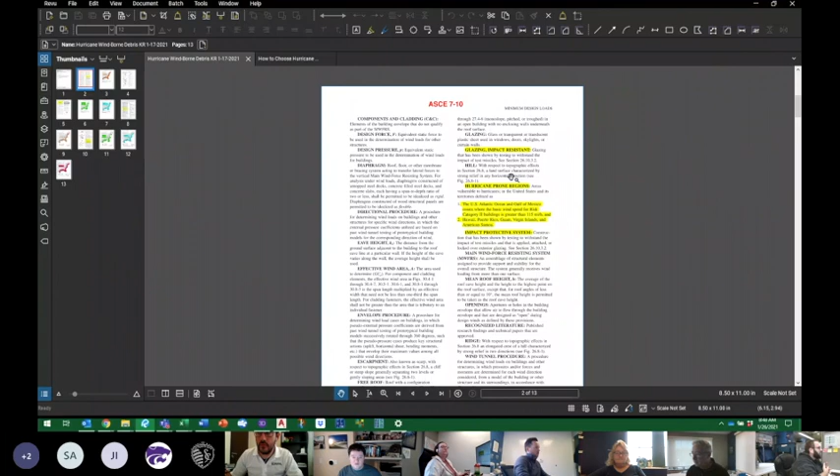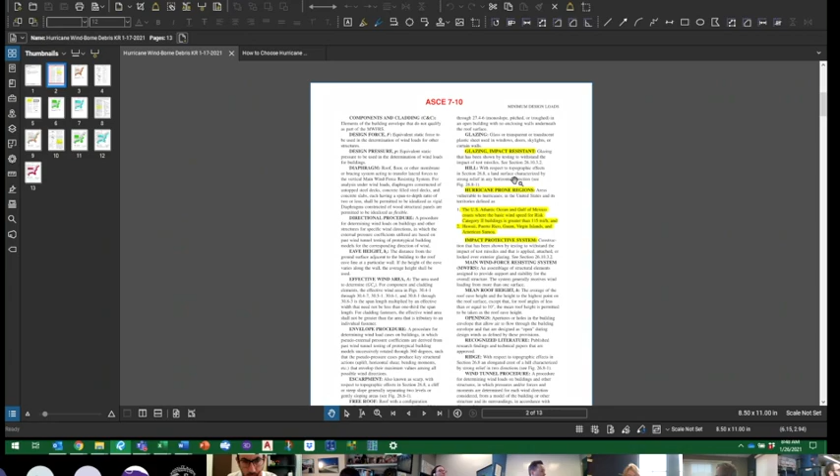Today I just wanted to discuss briefly hurricane and windborne debris regions and how they're affected by the code. So basically, for glazing impact, it just says it has to be tested with missiles. Well, those missiles are 2x4s that are typically launched in a testing apparatus at the structure to make sure everything works and doesn't blow out of the opening, and doesn't allow anything from the exterior to get in.

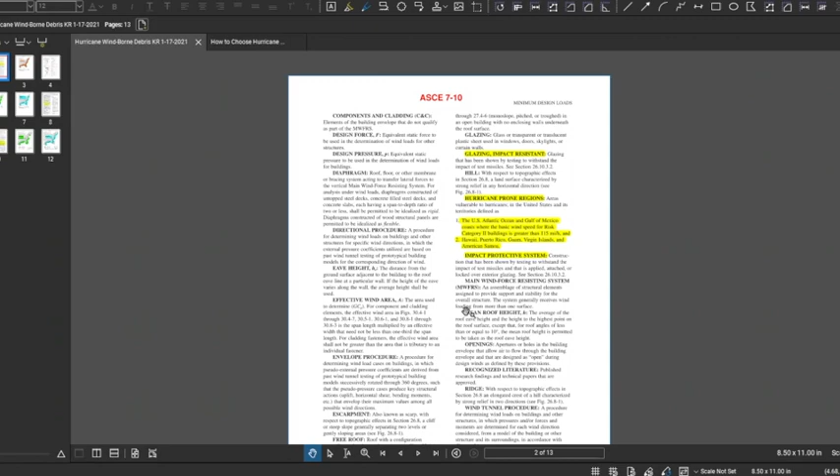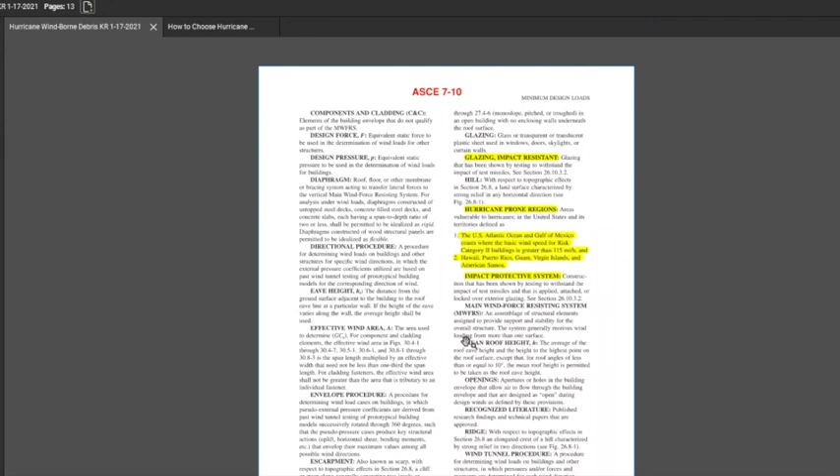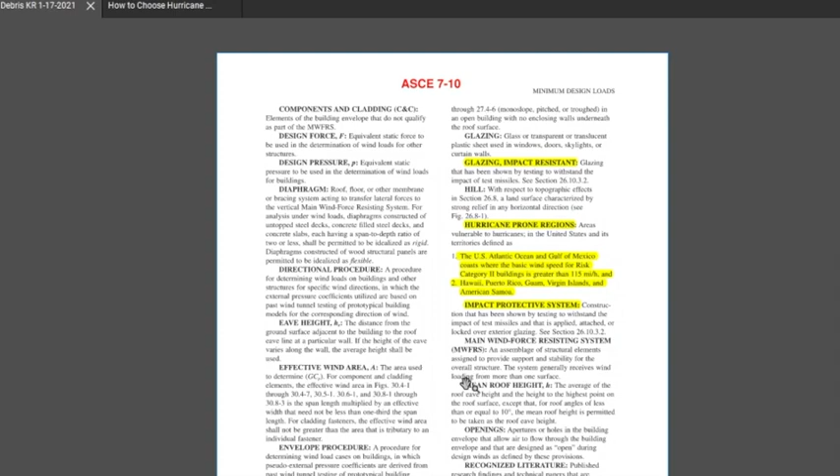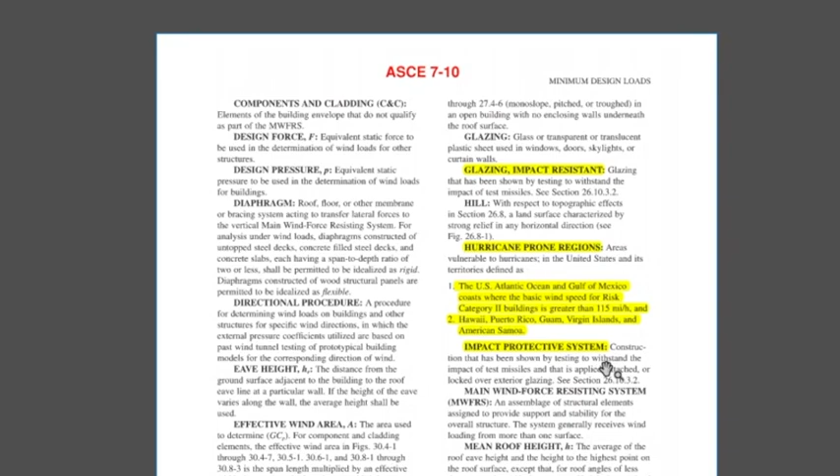Hurricane-prone regions are just going to be the regions that are prone to seeing the wind speeds associated with hurricanes. It doesn't mean that they have to have an impact-rated system within that zone. There is, as you'll see coming up, a limit to the speed where you have to have impact-rated systems. So for a Category 2 building, anything that's greater than 115 miles an hour is going to be considered your hurricane-prone region for 7-10.

Just to give you an idea on a map, anywhere that you see this orange color, that is the 115 mile per hour line. So from that to the Gulf, to the Atlantic, that's going to be your hurricane-prone regions, according to ASCE 7-10.

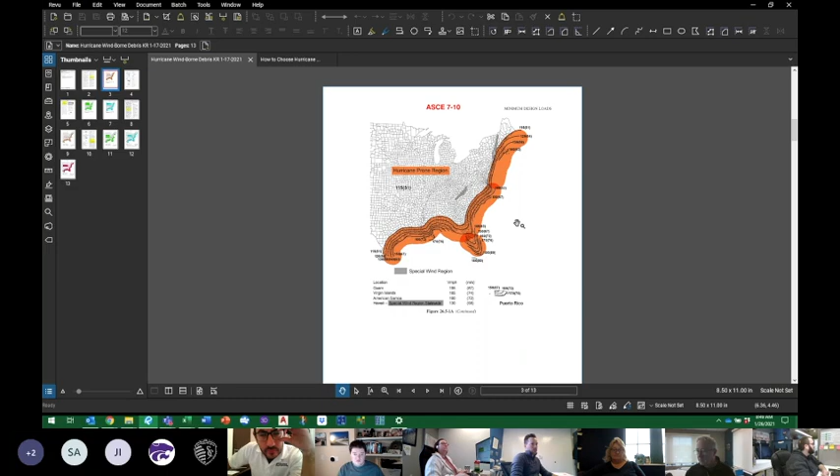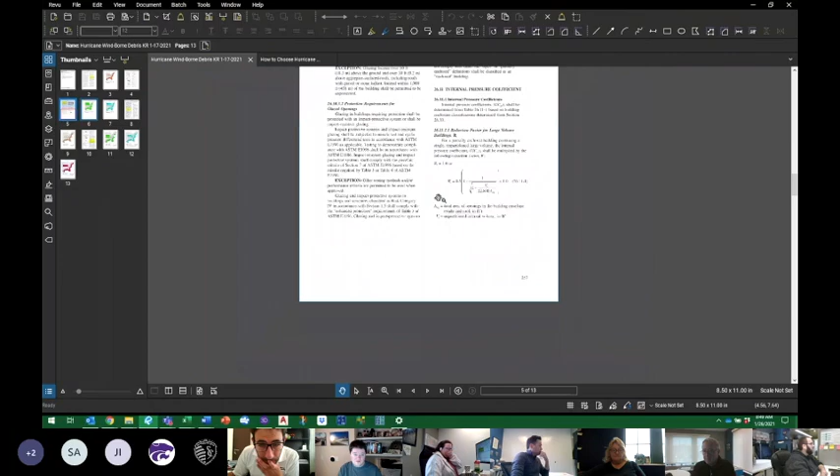So diving a little bit deeper, there's a section in Chapter 26 that deals with windborne debris regions, and they talk more in depth about what that is. Well, if you're within 1 mile of the coastal mean high water line for the ocean or the Gulf, or it's greater than 130 miles per hour, it has to be an impact-rated system. This also includes areas where the wind speed is greater than 140 miles an hour.

Now, there is a little note underneath it that is highly important for us to understand. For risk category 2 buildings and structures and risk category 3 buildings and structures, except those that are healthcare facilities, we're supposed to use the category 2 maps to determine the wind speed to get your requirements for an impact-rated system being needed or not.

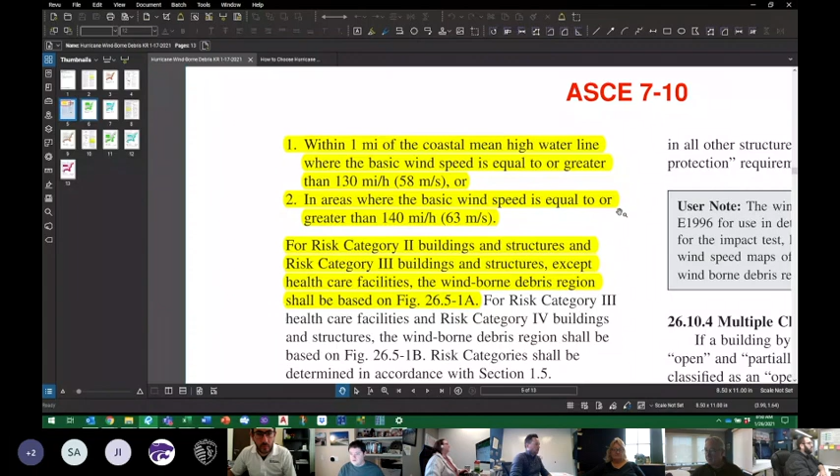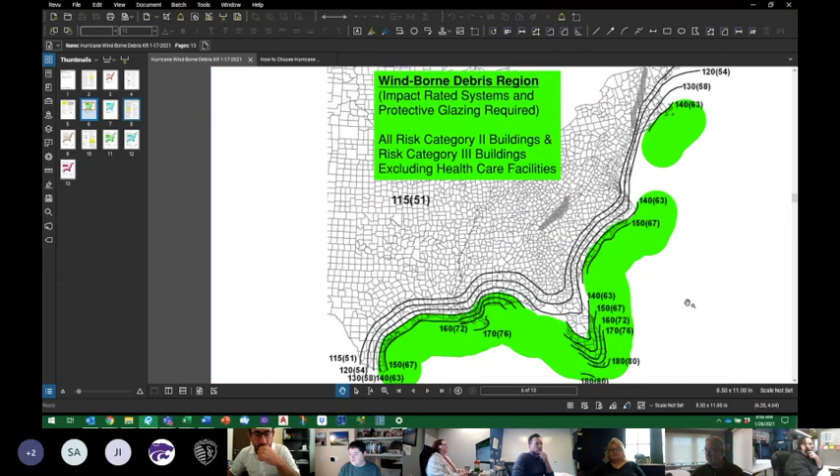So once again, we'll look at that map. 140 miles an hour is the limit where you do need to have an impact-rated system or protective glazing, for any risk category 2 building and any risk category 3 buildings excluding healthcare facilities. So that's what that map looks like. And this is all on the server and in the lessons learned if you need to pop it up just to look at it.

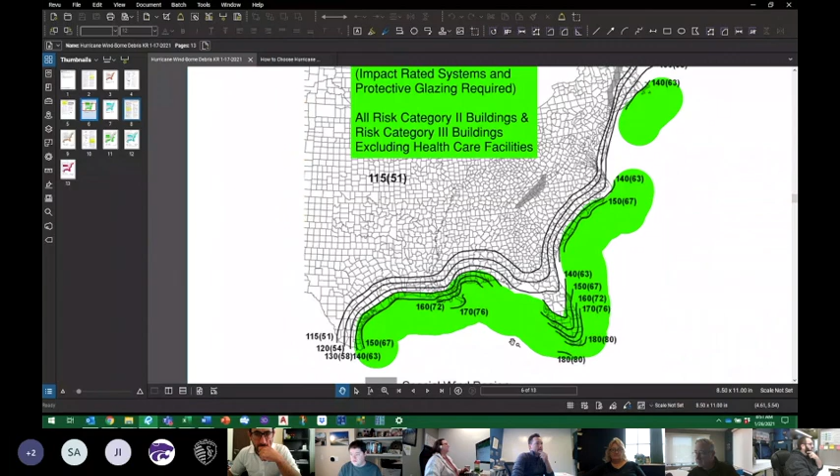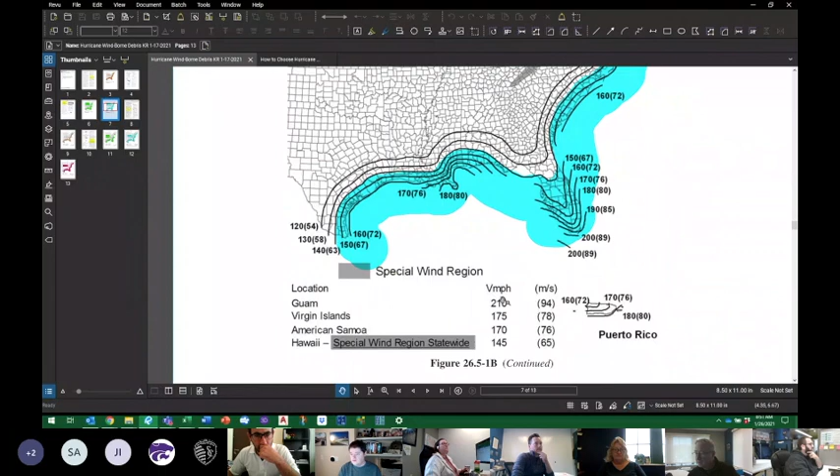And then for a risk category 3 healthcare facility and all risk category 4, we're using the risk category 3 wind maps to get that 140 mile per hour line. And you see that more of the inland coast is affected and requires impact-rated systems and glazing.

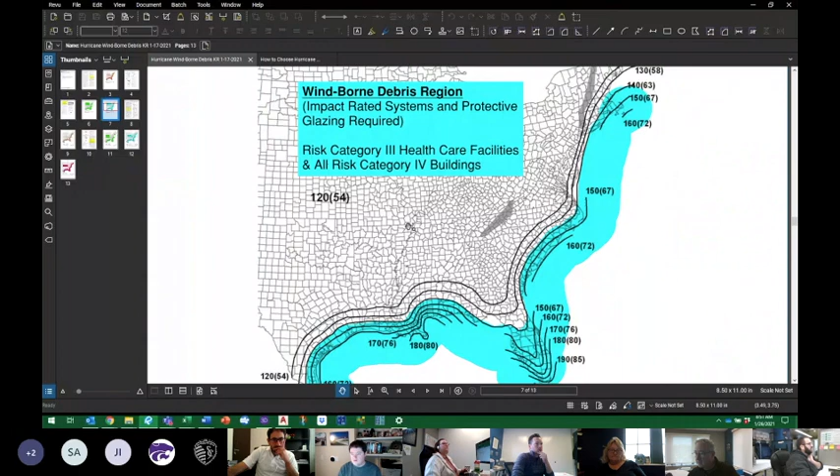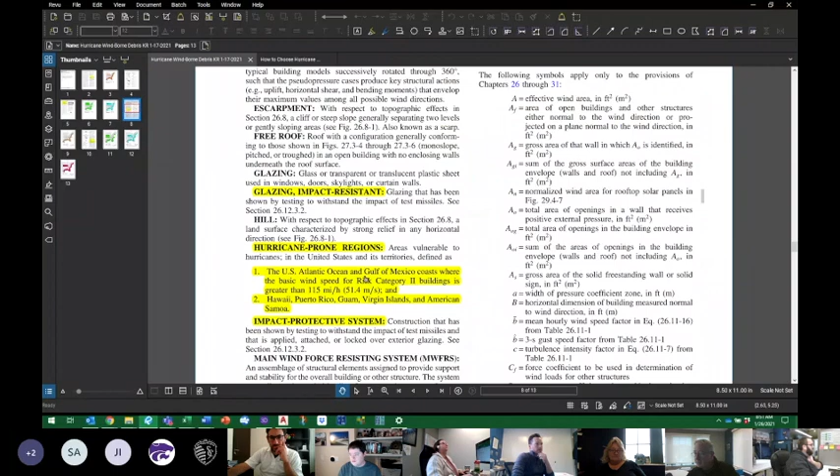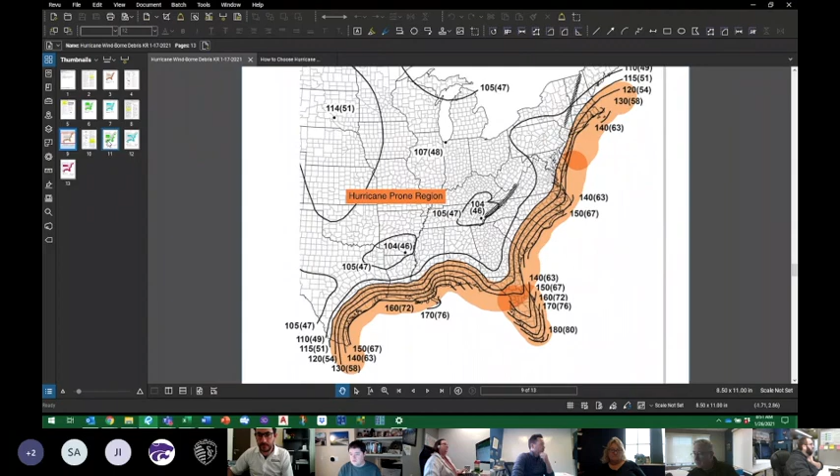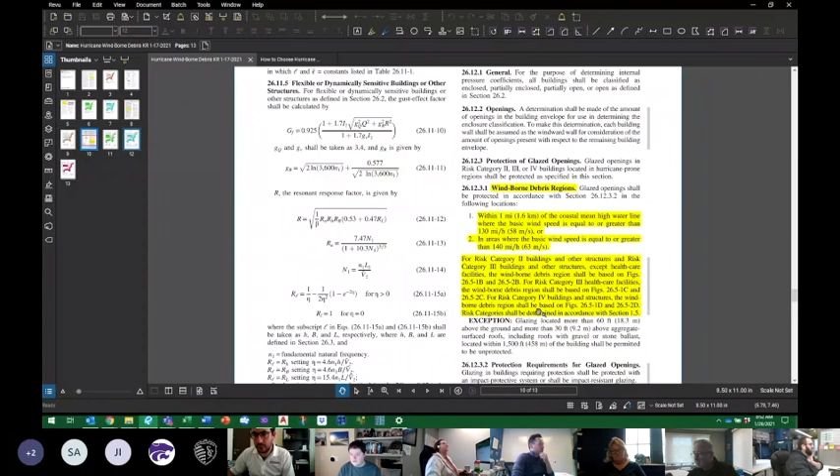7-16 basically has the exact same wording for glazing impact for the hurricane-prone regions. Very similar maps, slightly different just due to the new updated wind speed contours of the map. So you get a little bit more inland in 7-16. The same wording is in Chapter 26, the windborne debris regions, as it is in 7-10. It reads the exact same. It's just the maps that are changing.

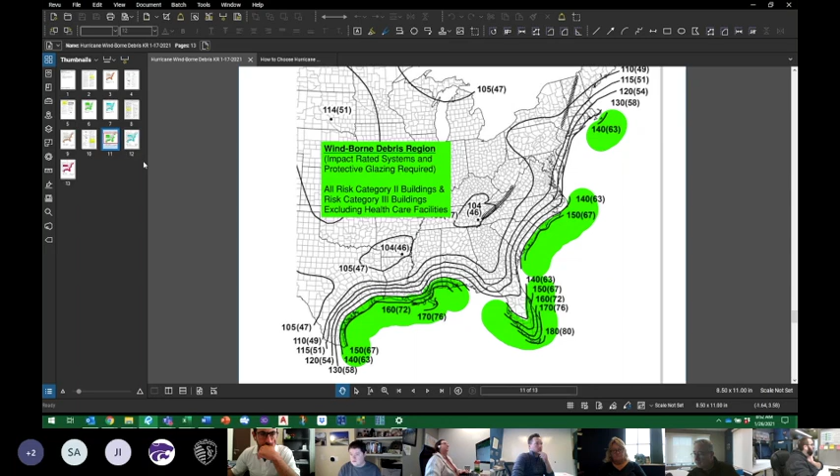So I just wanted to make everybody aware of the requirements for what we need, and what the maps actually look like for the regions that are considered hurricane-prone versus those that require impact systems. And if you've never seen the impact testing, I found a good little video, because I think it was 2 weeks ago, some of us sat in on a Texas Department of Insurance presentation, and they indicated in that presentation that you don't necessarily have to have a laminated IGU.

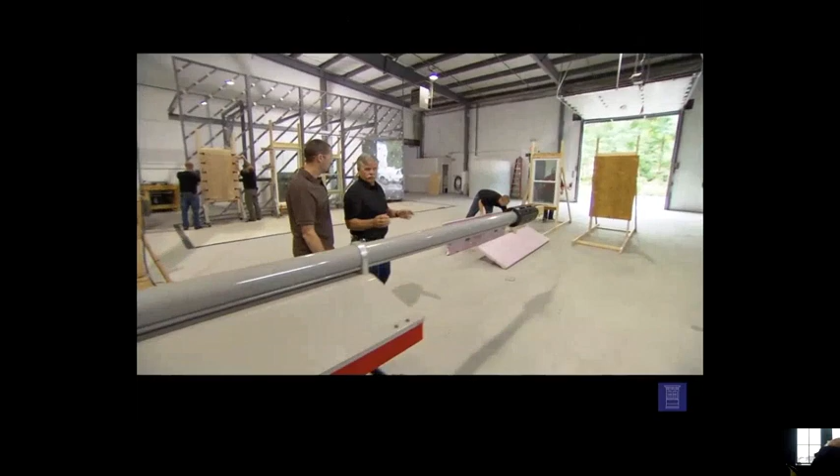There are other means to protecting the glazing, and this kind of goes into some of them, and you can kind of see the pros and cons of them. Now, this is a testing facility, and it's not really open to the public, but I thought it would be a great place to show you all of the options that there are when covering your windows and doors during a hurricane. And to do that, we're actually going to use this right here. This is actually a cannon that will fire a 2x4 at all of those options and show you how they hold up. It will fire a 2x4 at 34 miles an hour at a window or door.

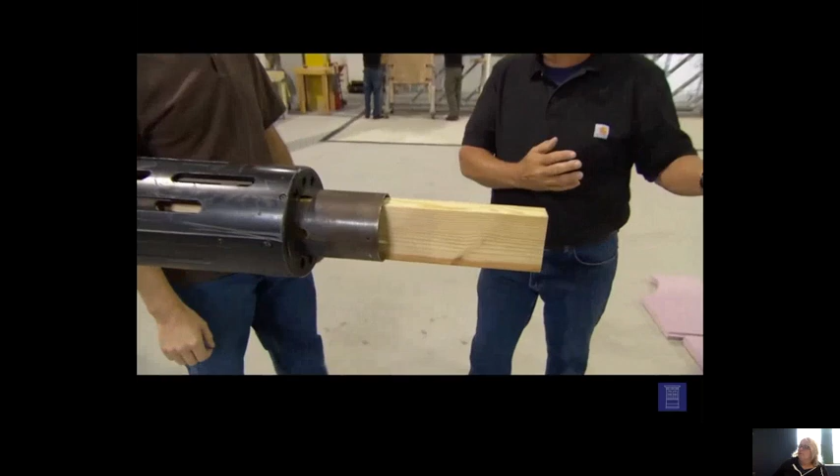Wow, a cannon, Tommy? Why 34 miles an hour? Well, 34 miles an hour, even though the winds of a hurricane may exceed 100 miles an hour, that's the speed that an object is picked up and thrown through the air, like a trash barrel or a tree limb, or in this case, a 2x4, pick it up and throw it through the air at those doors and windows at 34 miles an hour.

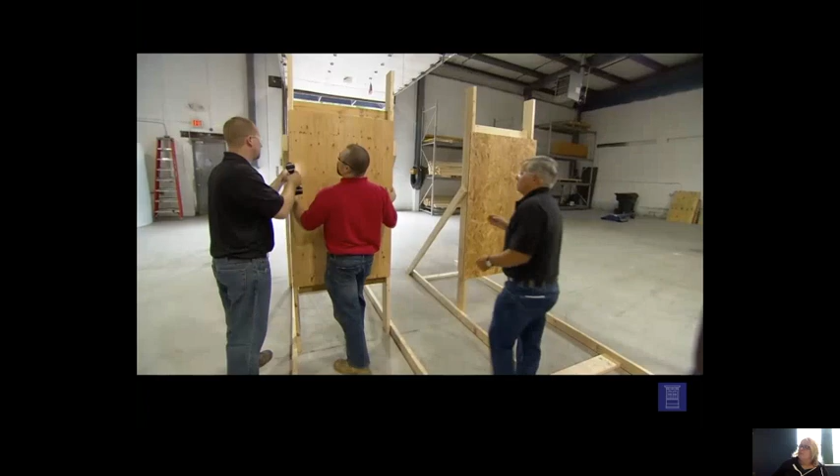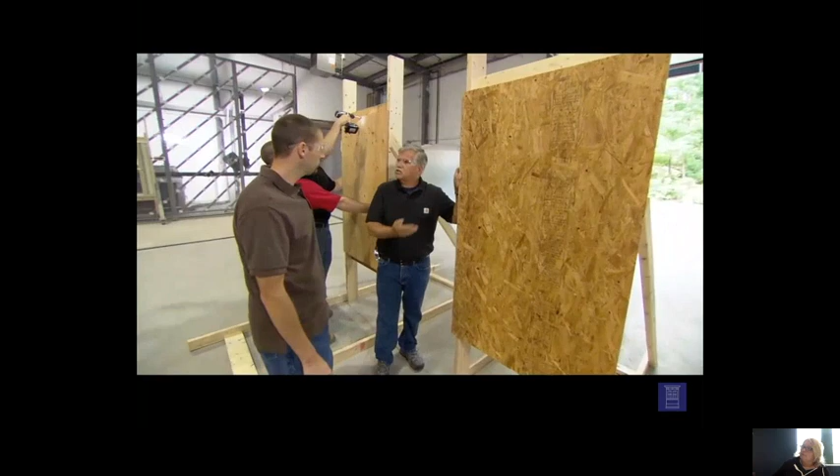Now, in most cases, you see people boarding up their windows and doors using plywood. Now, it's important that the plywood is cut to fit the opening, and the building code says that that plywood has to be a minimum of 5/8 of an inch thick. Now, that 5/8 of an inch thick plywood is $30 a sheet. Now, as a homeowner, you may go to the lumberyard or home center and say, well, gee, I can get a sheet of 1/2-inch OSB. It's $10 a sheet and save some money. Well, that's what I want to do. I want to save a few bucks. Well, okay, cheapskate, let's see what happens.

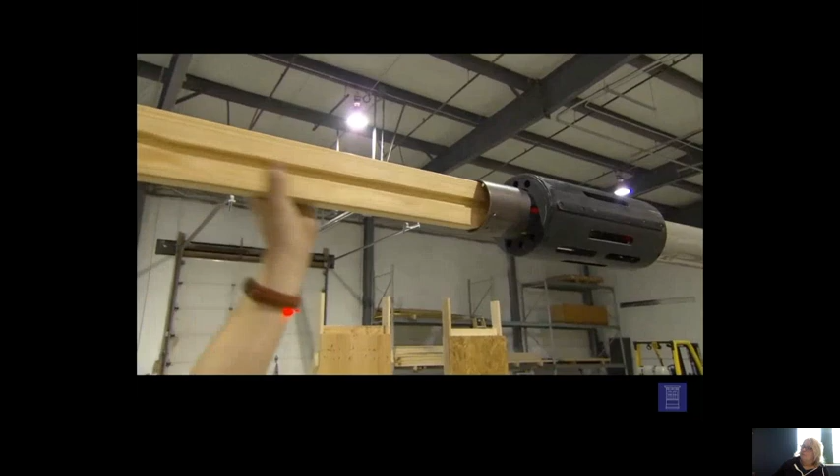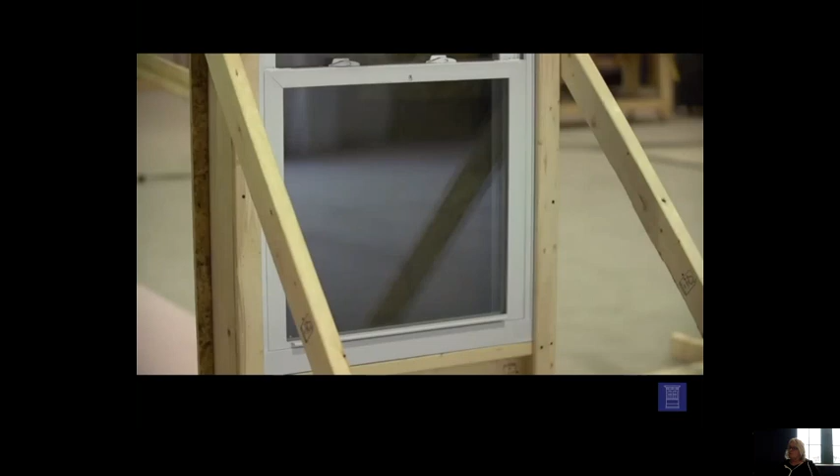Okay, here we go. You can see the cannon is aimed at the OSB. You can see the red laser. That's where it's going to hit it. Wow! That 2x4 went right through the OSB and through the window. Looks like you're going to have to get a new window. Wow, I didn't save any money there. You sure didn't. Let's see what happens with the 5/8 plywood now.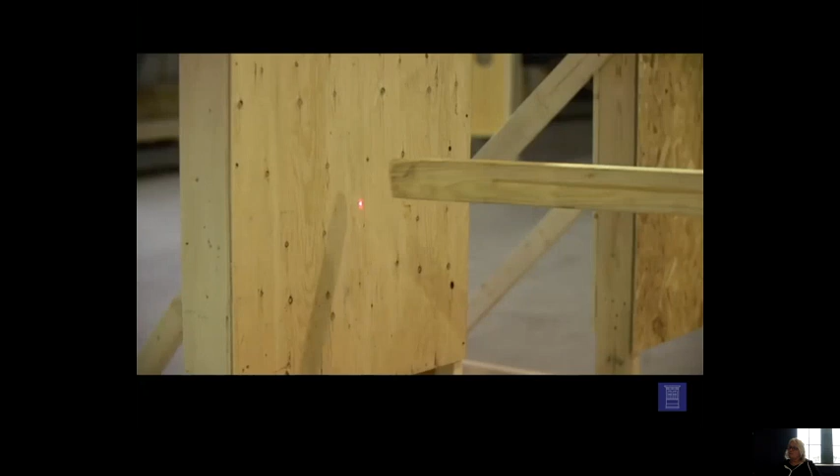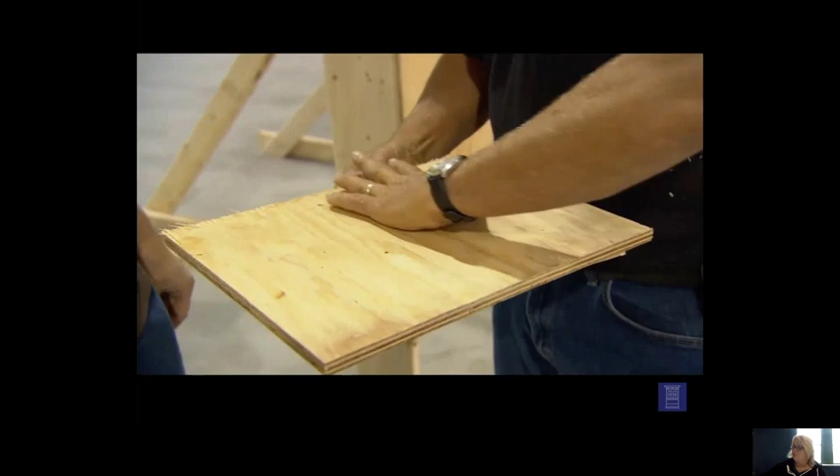Oh, the plywood did its job, and the 2x4 bounced right off of it, and the window is still in good shape behind it. It's remarkable how the plywood held up better than the OSB. Well, the plywood is much stronger, and let me show you. The plywood is actually different laminates, and the laminates run in different angles. There's long strands that run this way, another one that runs this way, and so on down the line, and that's what gives it a lot of strength, along with the thickness. Now, OSB, or oriented strand board, are actually small pieces of wood that are glued and put together, and it's not strong enough to withstand that force.

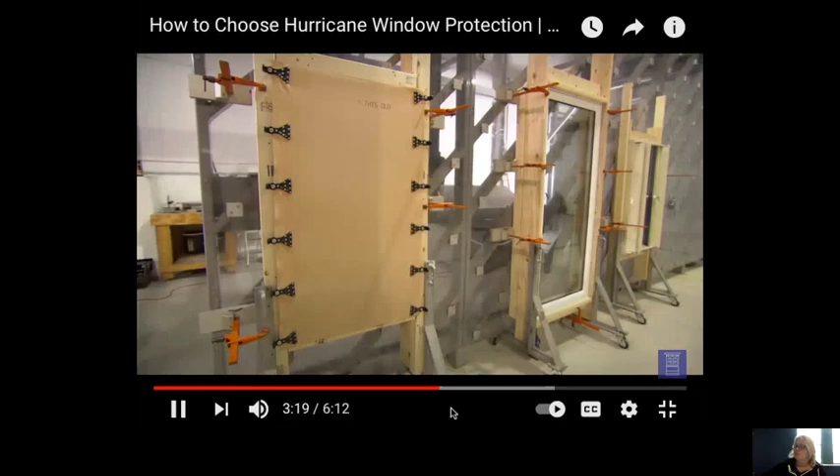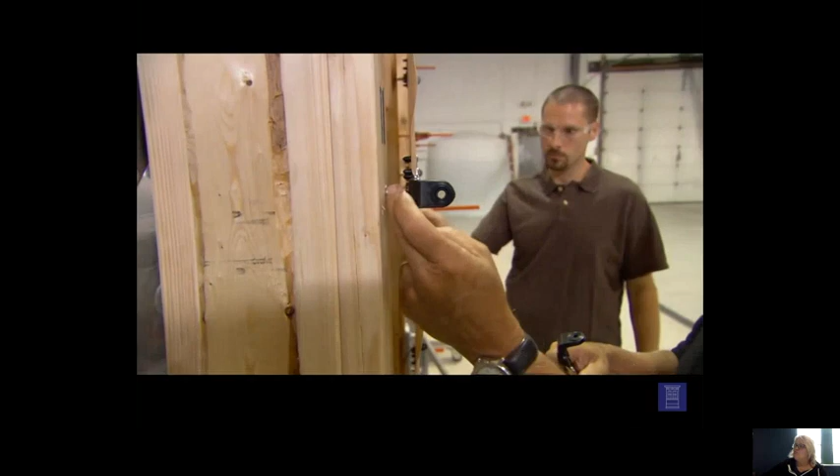Now, I know the 5/8 plywood did its job. That's pretty heavy to lug up to my second floor window. Do you have any other alternatives? We sure do, and let me show you some. Over on this wall, we set up some windows. This window we covered with this fabric right here. It's a ballistic nylon treated with resins, and it's really strong. It's held on the building using these brackets right here and these fasteners that stay on the building all the time. Well, this thin piece of nylon is going to protect my window? I don't know. Let's test it and find out.

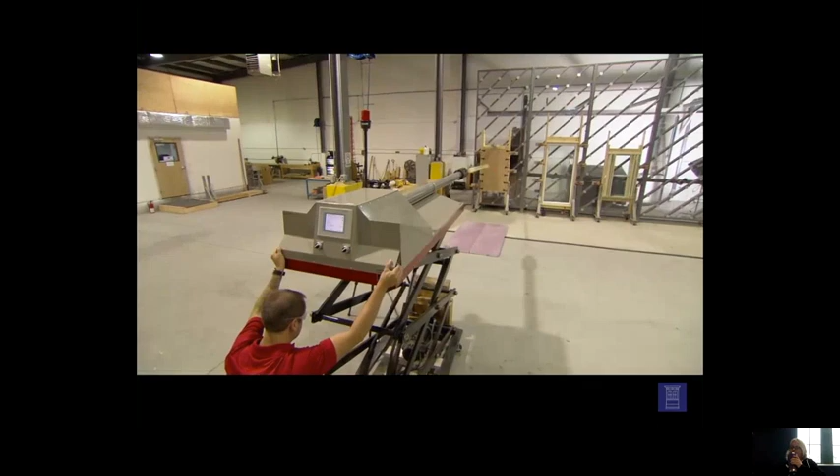Wow, Tommy, what happened? Well, Paul, the fabric did its job, and the 2x4 didn't enter the building. And in many jurisdictions, that's acceptable by the building code. Yeah, but the window broke. Right, and we installed the fabric as per the manufacturers. But it is a fabric, and it does have some deflection. So under these conditions, when the 2x4 hit the fabric, it deflected enough for the 2x4 to break the window.

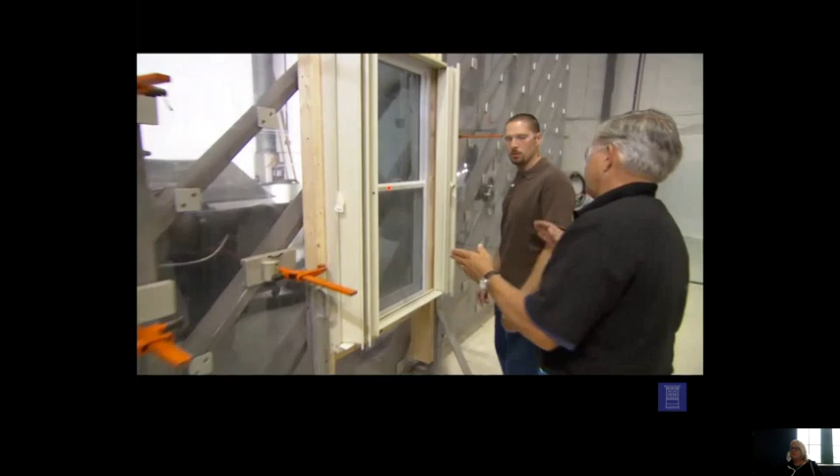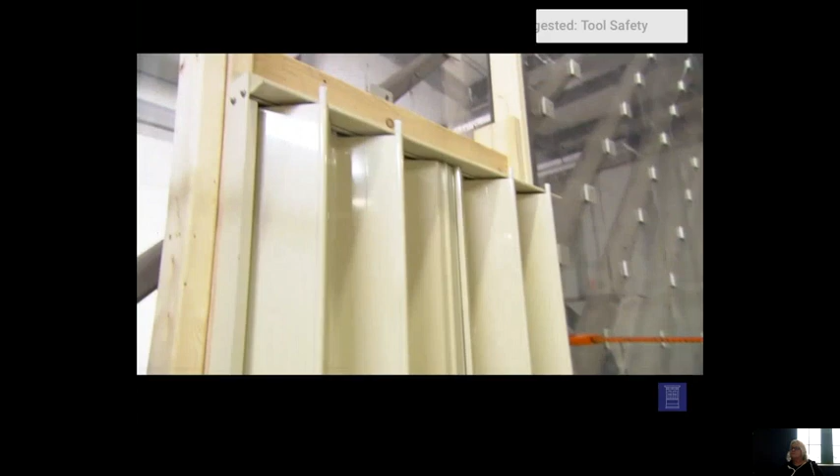Now, both the plywood and the fabric have to be installed onto the building every time there is a storm coming. This is a metal shutter that's permanently installed on the exterior of the building. You may have to get up onto a ladder to close it and lock it. They do have metal shutters that you can operate from the inside, and even some that operate remotely. Remotely? Let's give it a test. Okay.

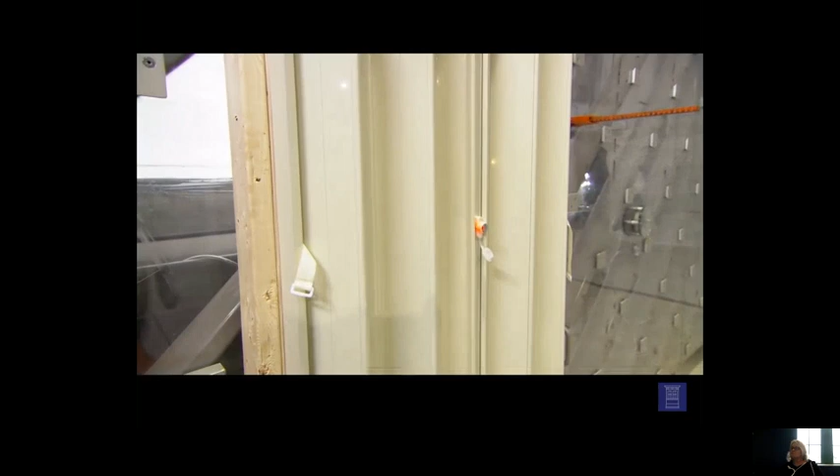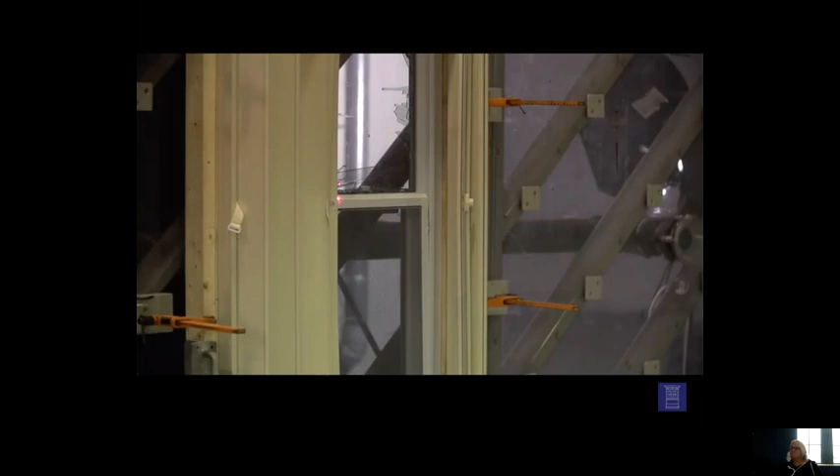Whoa! The window broke on that one. Tommy, what happened? Another broken window? Well, here in the test lab, they have to aim the cannon so it hits in the center of the shutter. In this case, it hit in the center of the shutter exactly where the lock is, bending the shutter, snapping the lock, opening the shutter.

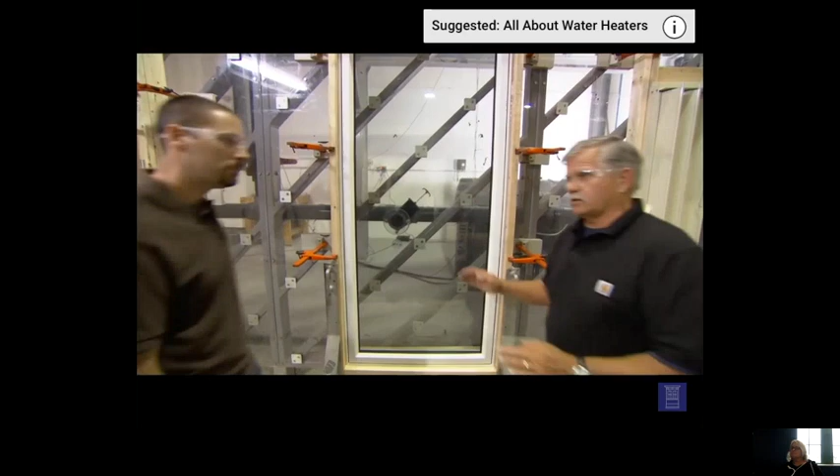Now, all of the systems that we have looked at already are actually called active, which means you have to do something to protect your window. This is a passive system right here. That means you don't have to do anything. It's built into the system. It has impact glass. It's an insulated window.

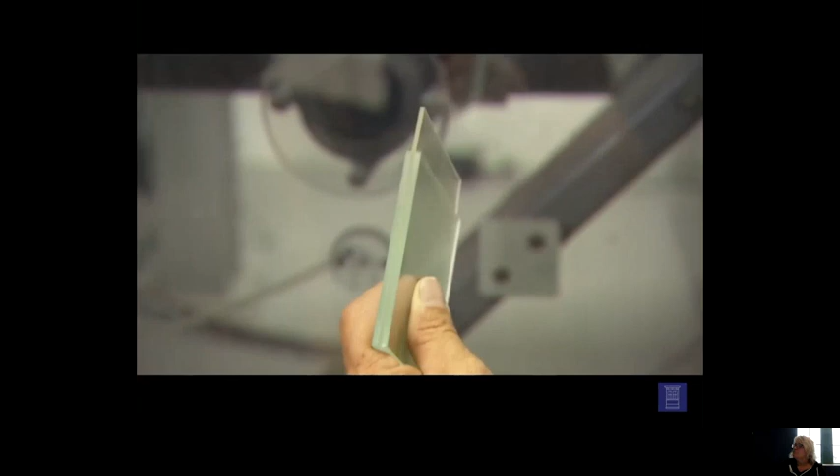Now, the outside layer of glass is actually 2 layers of glass. And in between those 2 layers of glass is sandwiched this membrane right here. So if a flying object should hit your window, it will shatter like a car window, but you won't get a hole in it. Well, let's test it out. Okay.

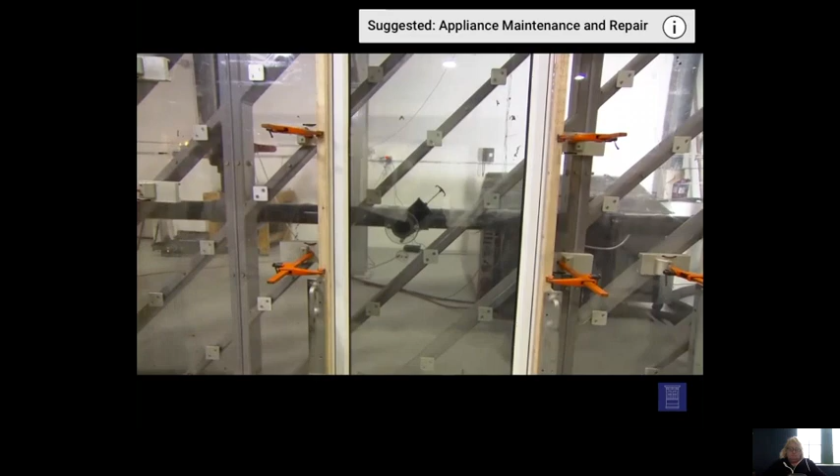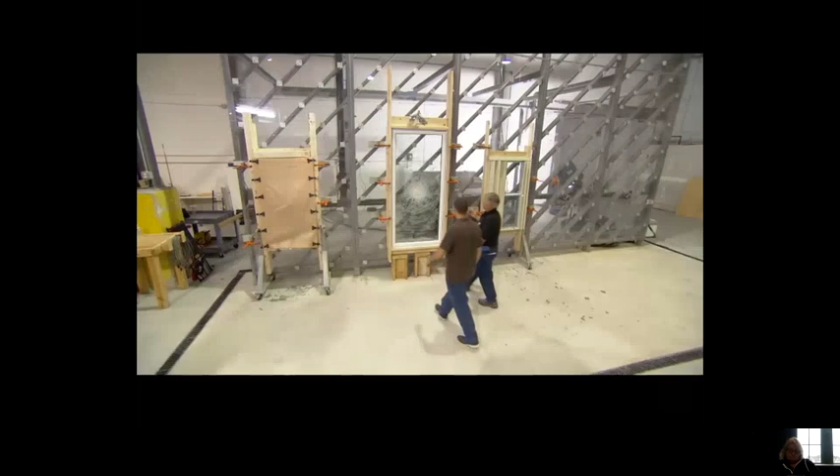Whoa! Well, it broke the glass, but no hole. And your house is still protected against wind and rain. This is great. Thank you, Tommy, for showing me all these options.

Yeah, so ultimately, most of the people that we deal with are going to have the laminated, insulated glass, and the laminate is on the inboard pane of glass, usually. Okay, so talking about hurricane zones, that's actually a really good kind of primer for one of the things I was going to talk about today too.

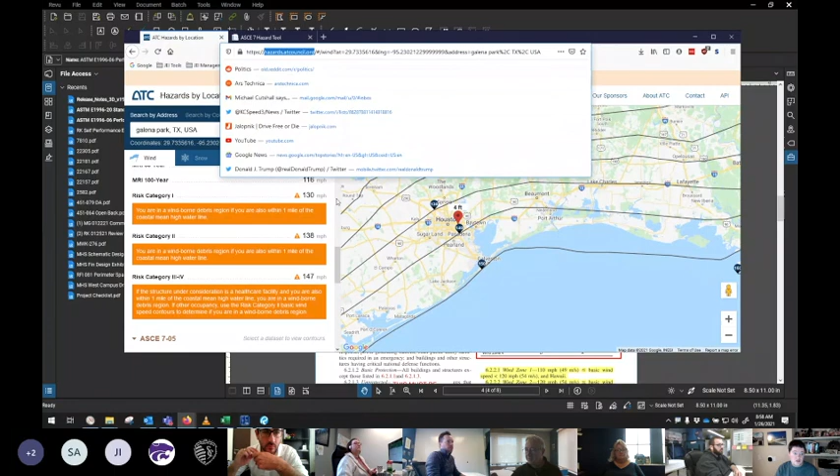So just to add to what Kyle was talking about hurricane zones, if you guys don't have this ATC Council hazards by location map saved somewhere, I would highly recommend you bookmark this and use it, because it gives you maps for the wind speeds based on your location. It also does snow and seismic if you need to verify based on what's in structural drawings.

And based on the location of your project, it actually tags your windborne debris regions and all of the stuff that Kyle talked about as an easy summary on what needs to be included, what doesn't. So that's very helpful to make sure you're actually using the correct, is it impact rated, is it not?

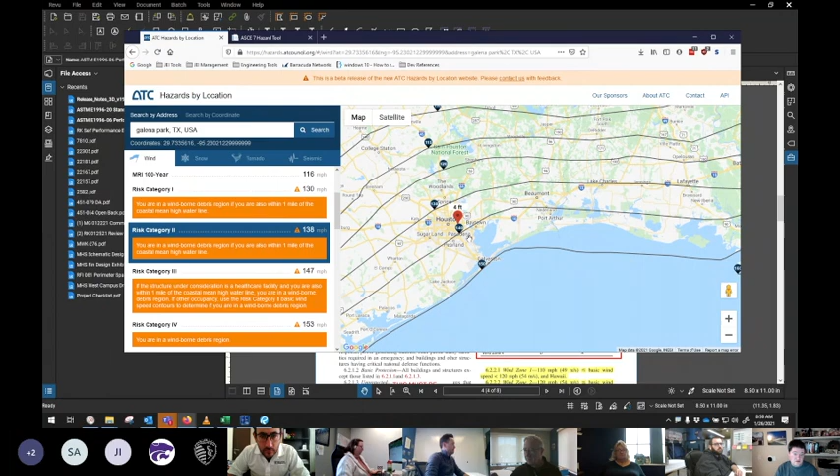And then there's also exceptions, like the city of Houston defines their wind speed as 139. So there are some hairy sections of the city that are around this 140 line that may look like they need to be rated, but they're not per the city. So those are some of the things you need to be very, very careful about in these impact hurricane regions.

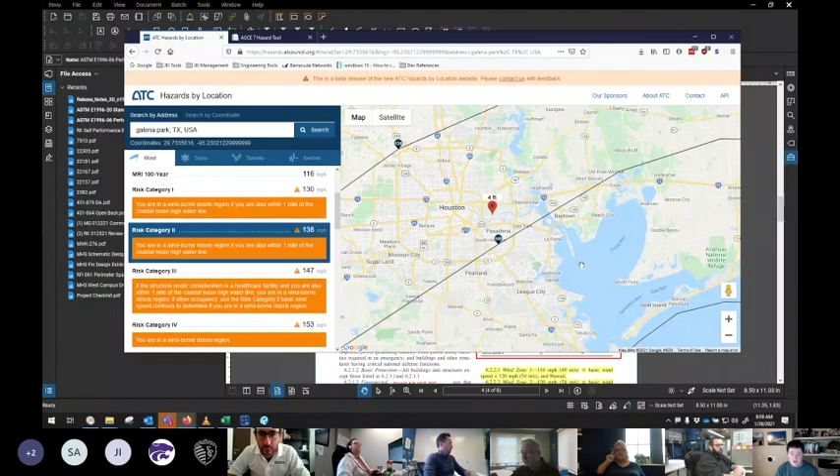Over in Florida, it's going to be the same thing. There's some places in eastern Orlando that start getting really close to that line. And sometimes the structural drawings will use 140. Sometimes they'll really push it and back it down to 139, so it's not impact rated, to avoid that cost and stuff. So just pay very, very close attention to that.

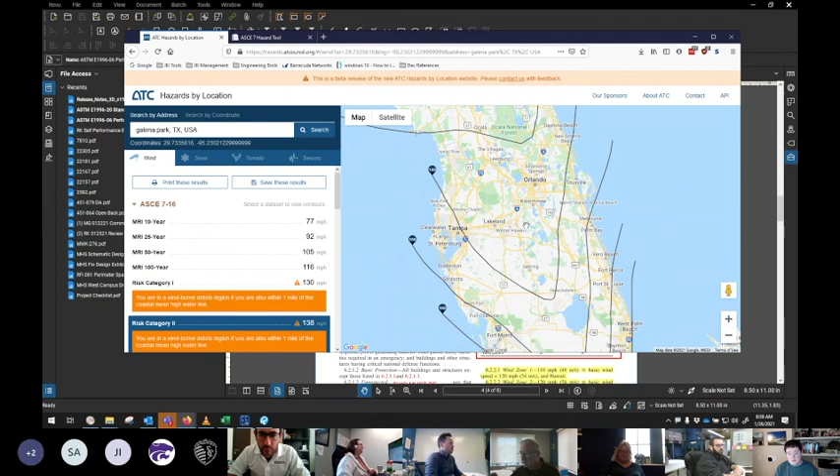And if there's ever any questions, come bug me or Matt, who have dealt with this more, so we can point you in the right direction. So there's both the ATC website and the ASCE 7 tool; it isn't quite as good about marking what's impacted and stuff, but both of those are really useful.